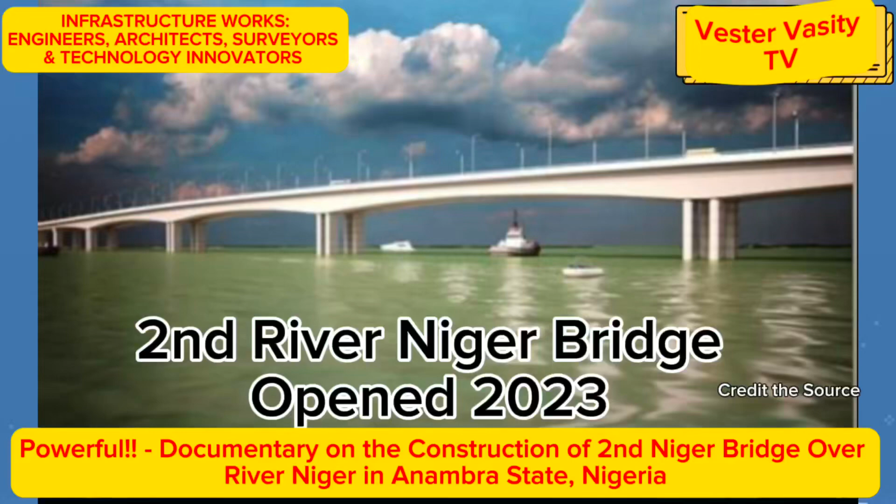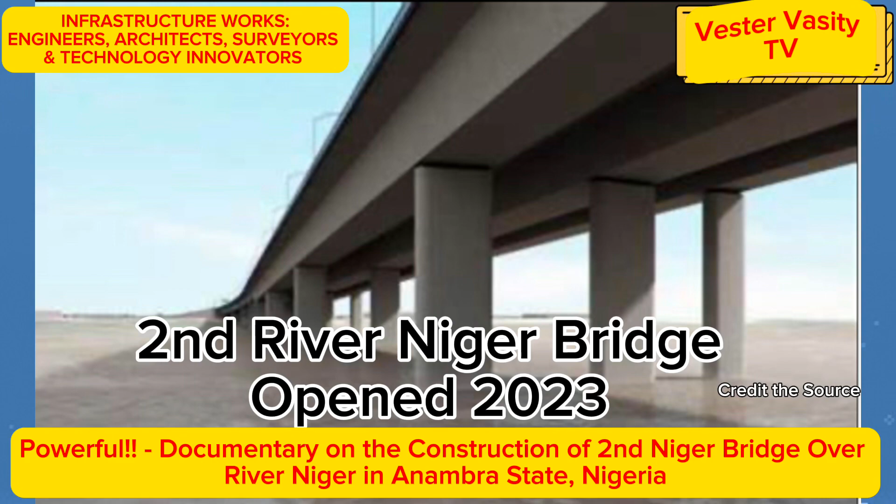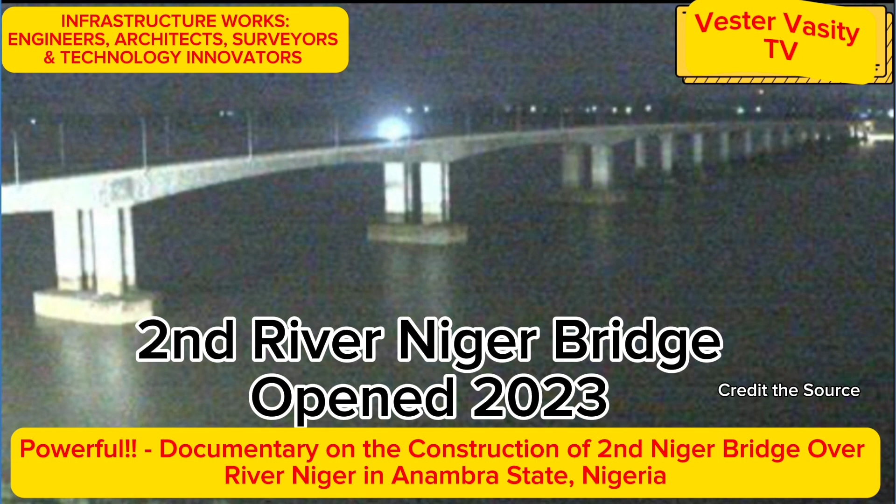This video presents a detailed and thorough analysis and documentary on the construction of the second Niger Bridge in Anambra State, Nigeria, recently opened to traffic and motorists. It will replace the existing first Niger Bridge, completed and opened to traffic in 1965, which is now obsolete.

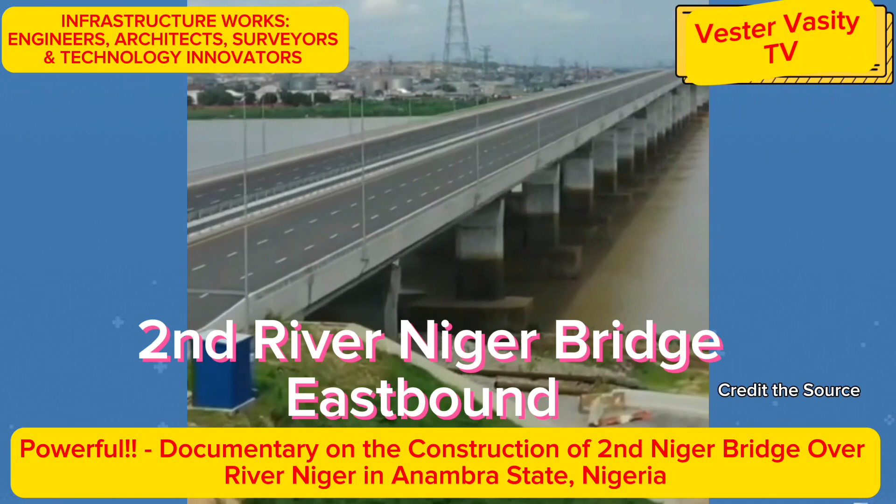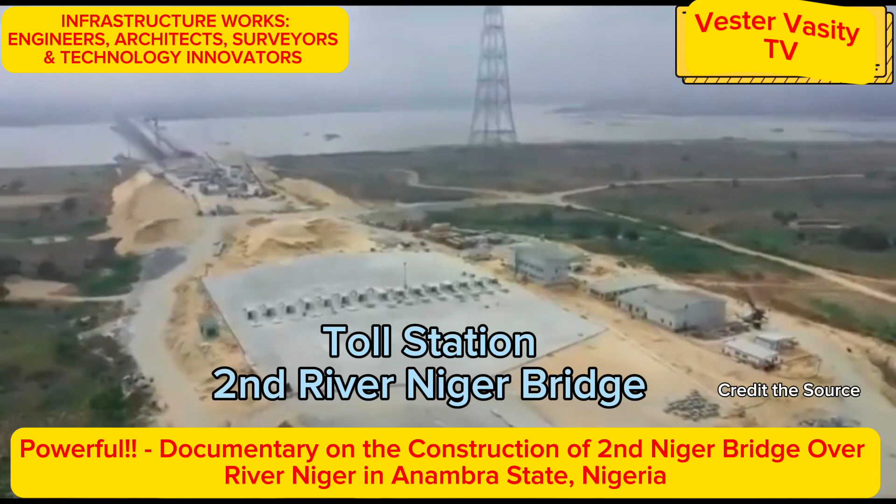It's important to emphasize that this second River Niger Bridge project was developed and funded through a public-private partnership (PPP), involving Julius Berger and the Nigerian government. The private contractor Julius Berger provided the planning, logistics, and construction of the second Niger Bridge.

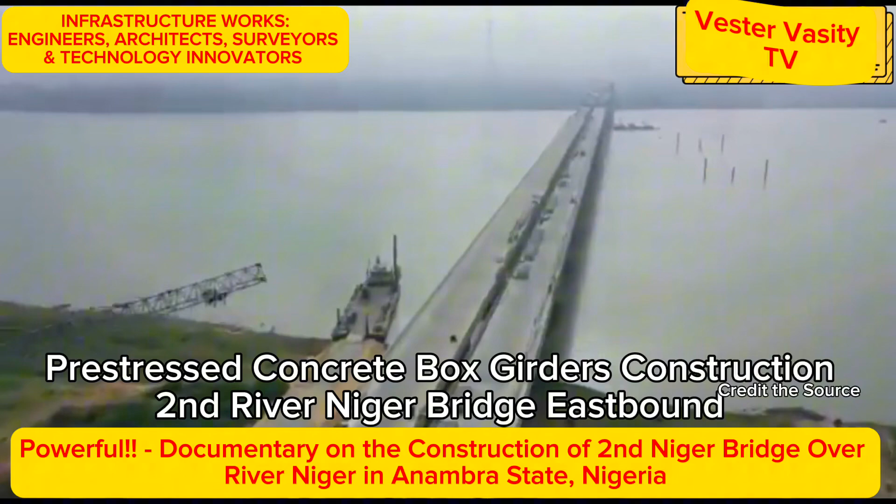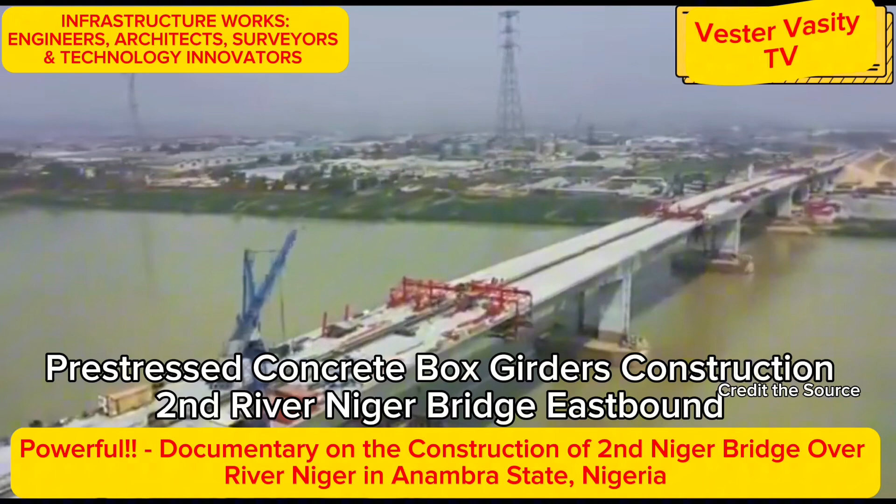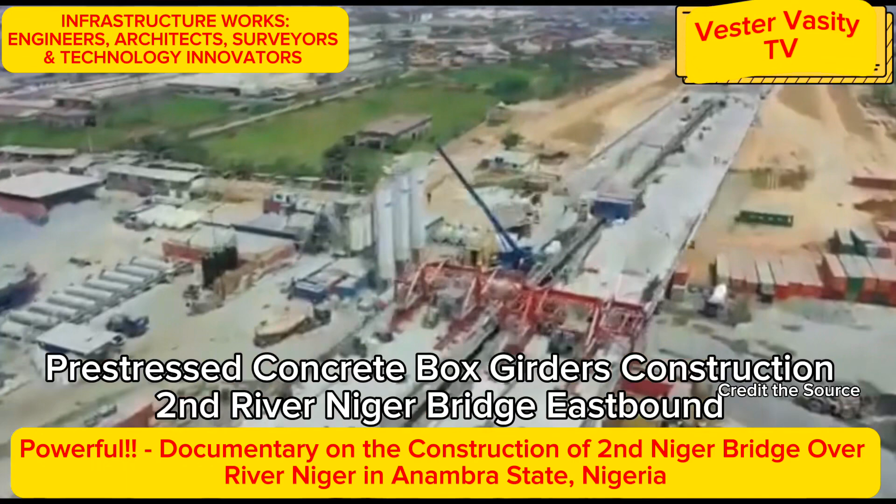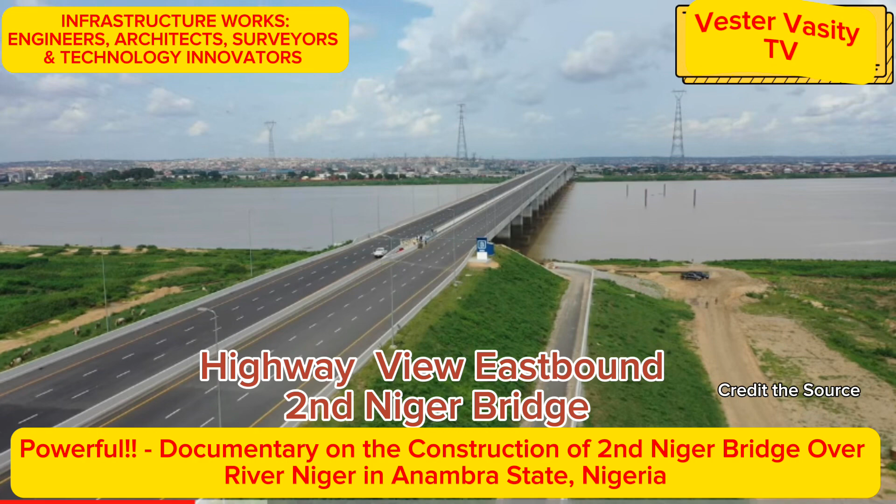The scope of work for the second Niger Bridge comprises the construction of a 1.60 kilometer, or approximately 1.01 mile long, dual elevated single cell pre-stressed concrete box girder bridge across the River Niger with a maximum span of 150 meters, or about 500 feet, as well as one motorway interchange junction, one toll station, and 10 kilometers, or 6.21 miles, of dual highway road network.

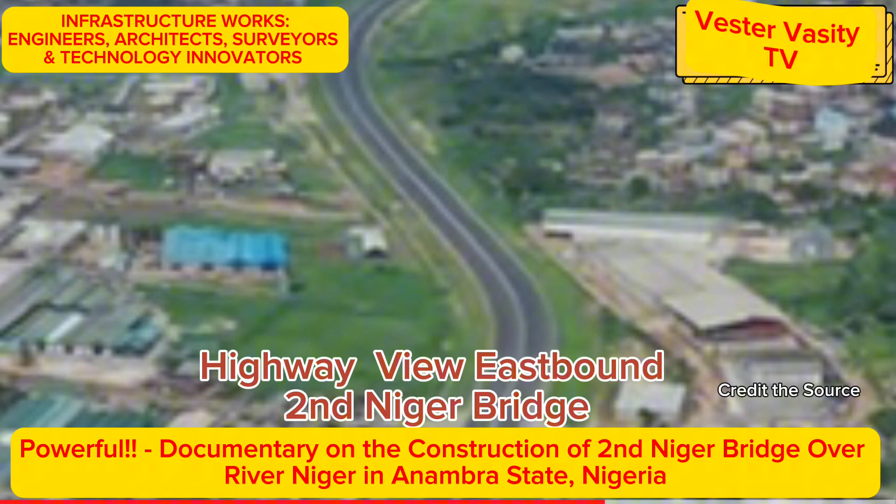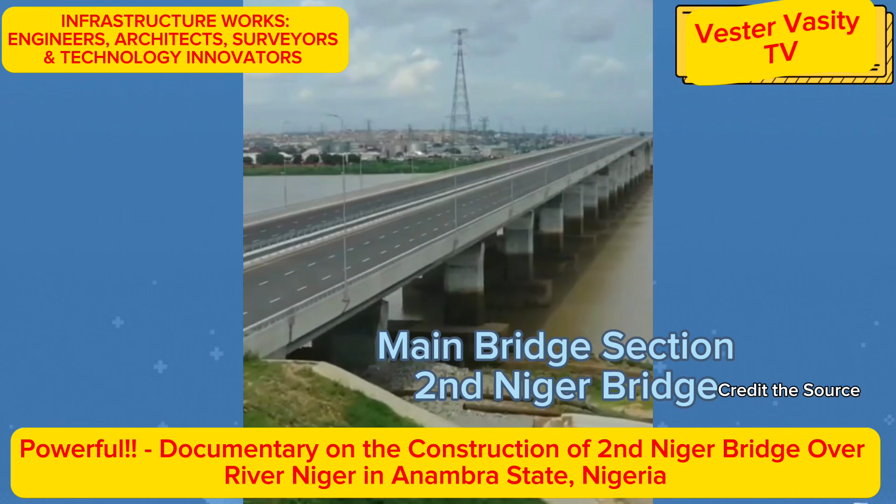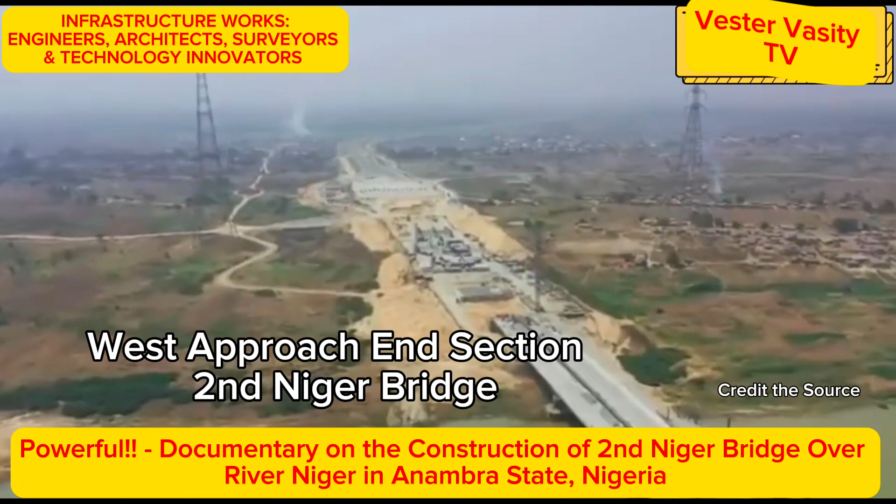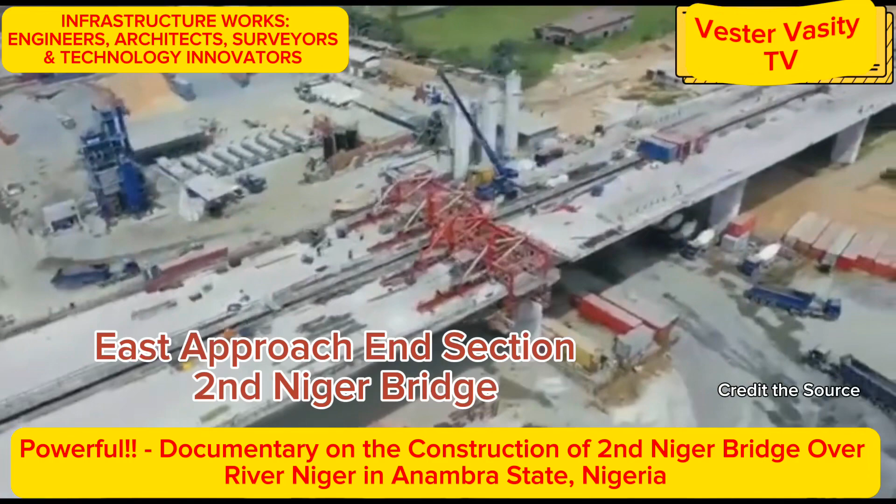The following are the standard steps needed to construct any bridge across a river or body of water. Step 1: Conduct a site analysis to determine the best location to build a bridge based on the following factors: the width of the river (in this case River Niger), the depth of the river, the strength of the water currents, and the soil conditions at the bottom of the river.

The chosen location should be able to support the weight of the bridge, to withstand the loads it will be subjected to, be easily accessible for construction materials and purposes, and be cost effective to build.

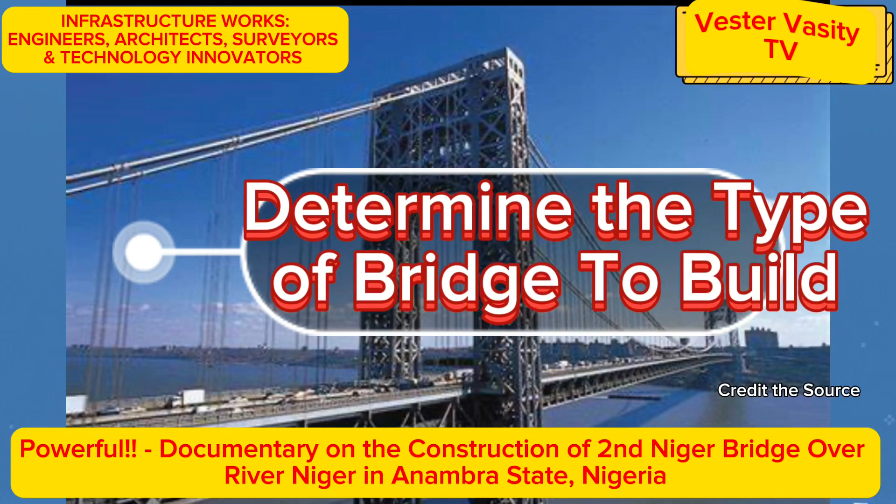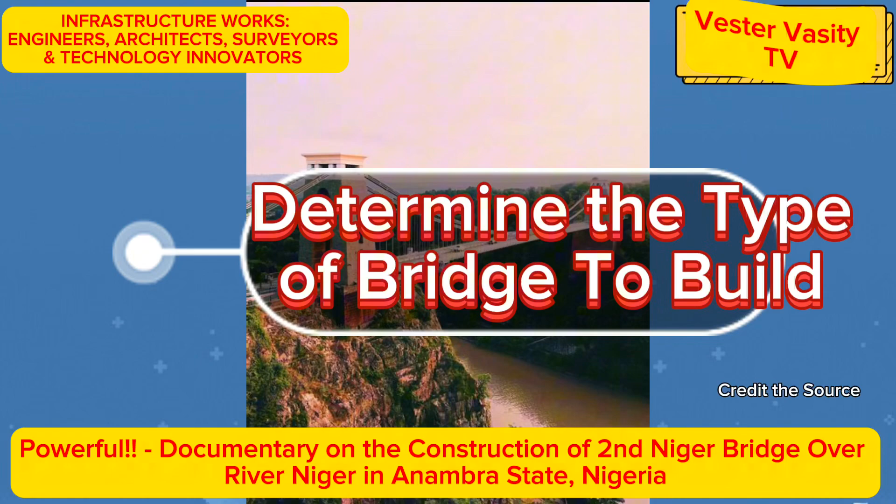Step 2: Design the bridge, in this case the design of the second River Niger Bridge. First, determine the type of bridge to build based on the span of the bridge, the terrain of the location, the type of loads the bridge will need to support, and the availability of local material and resources at the location.

The main types of bridge to consider are: 1. Girder or longer beam bridge, for cost-effective and shorter span bridges. 2. Arch bridge, for spans over valleys or mountains. 3. Suspension bridge, for longer spans over water. 4. Cable stayed bridge, for medium and long span bridges.

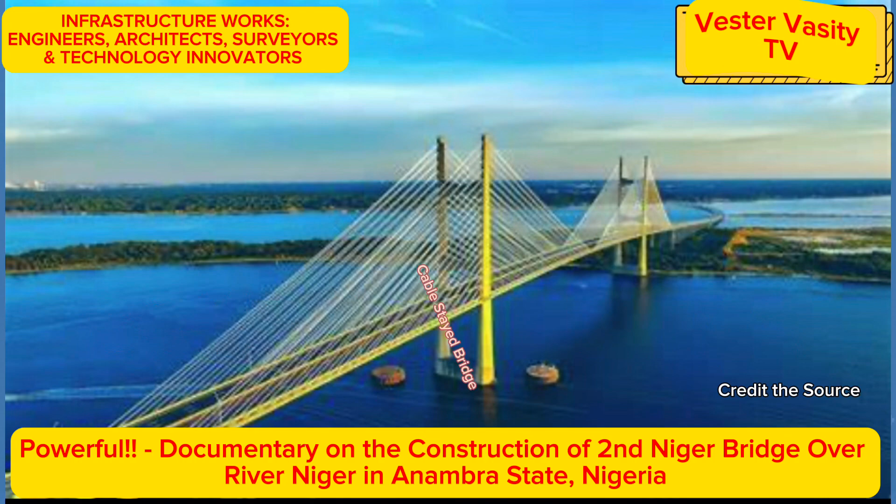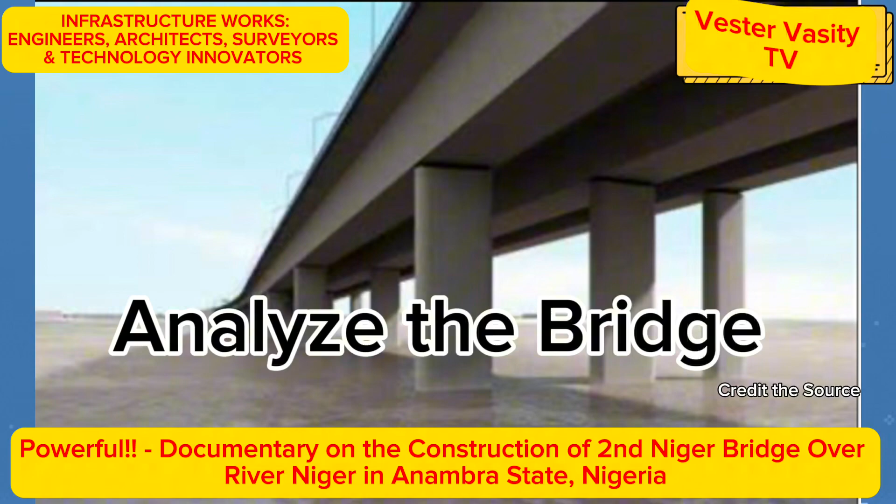After selecting the type of bridge to construct, the designer would carry out the analysis and determine the size and shape of the bridge components, by calculating the loads and stresses the bridge will be able to withstand, and by calculating the size of the girders or longer beams and other structural elements that make up the bridge.

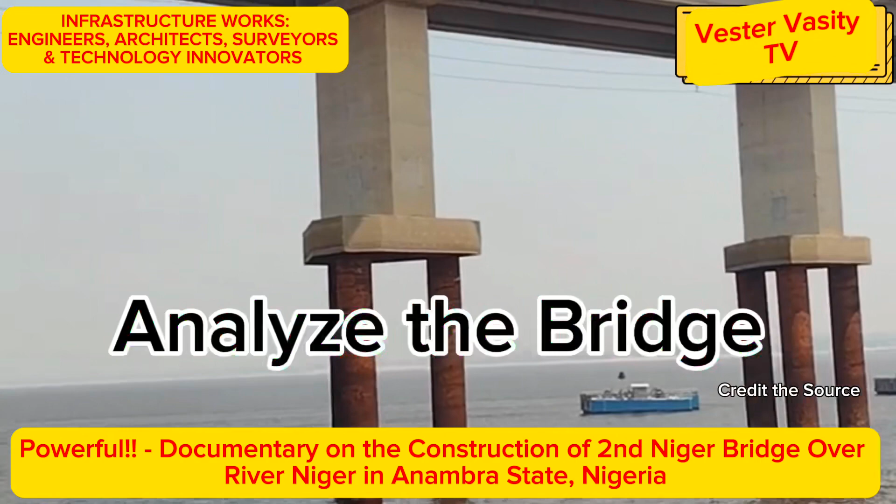The size and shape of these components will depend on the loads that the bridge will need to support, as well as materials, properties, and manufacturer's capabilities.

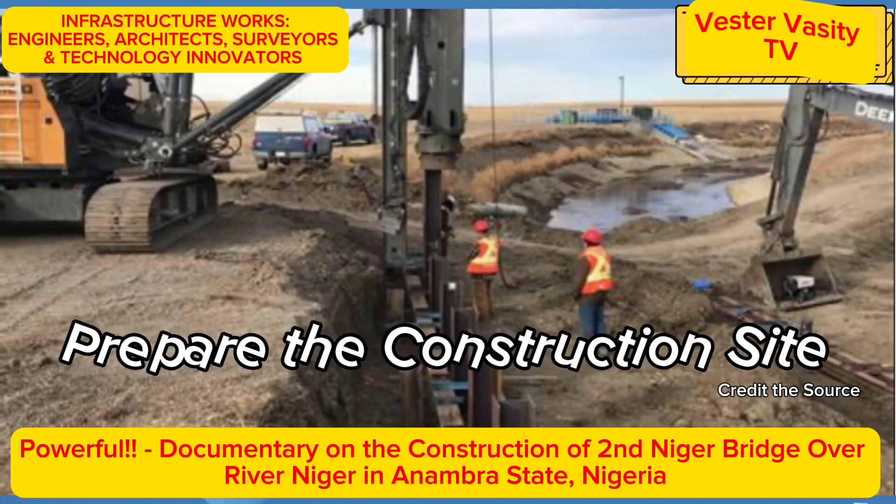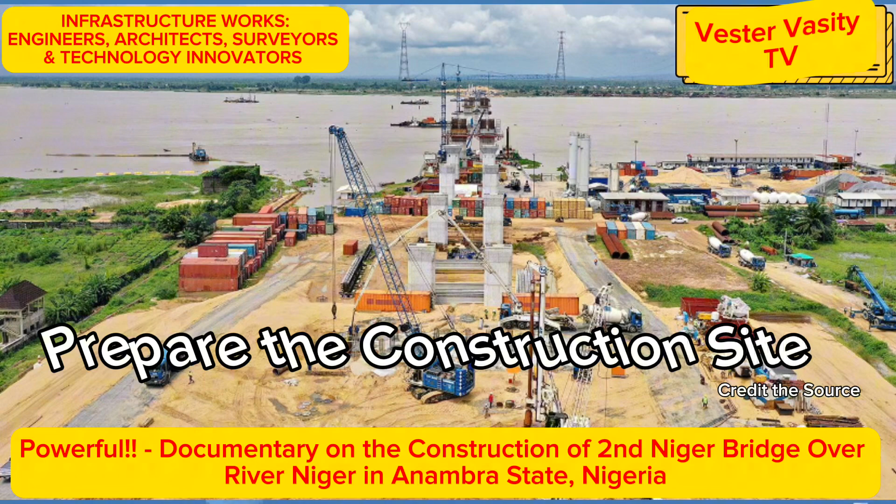Step 3: Preparation of the construction site. This may involve dredging the River Niger at the bridge location for installation of the piles, building the staging area or field for the equipment and material needed for the work, building temporary support structures including staging cranes, dredgers, loaders, concrete plants, pre-stressed concrete facilities, dump trucks, concrete trucks, etc., and installing coffer dams, enclosure and fencing, and other support structures and trailers needed for this work.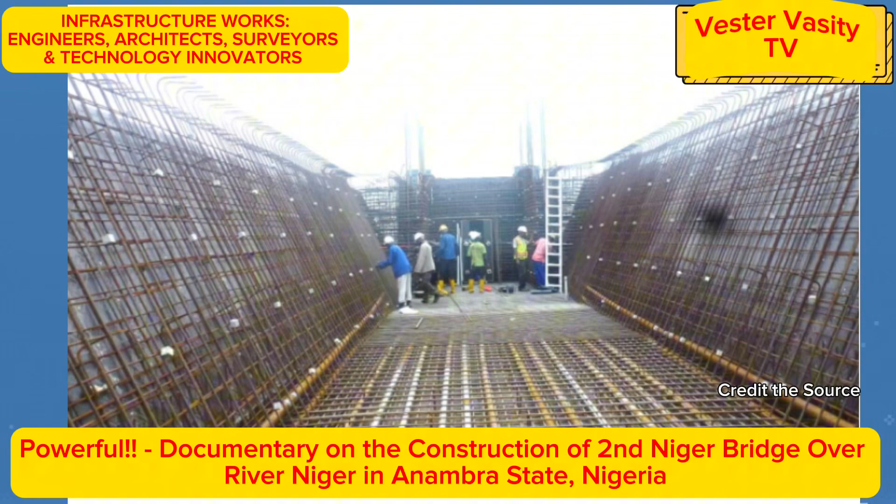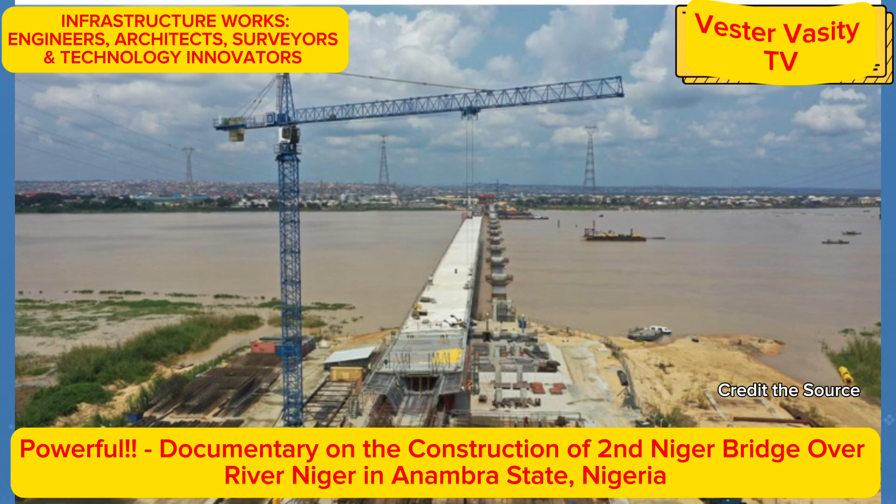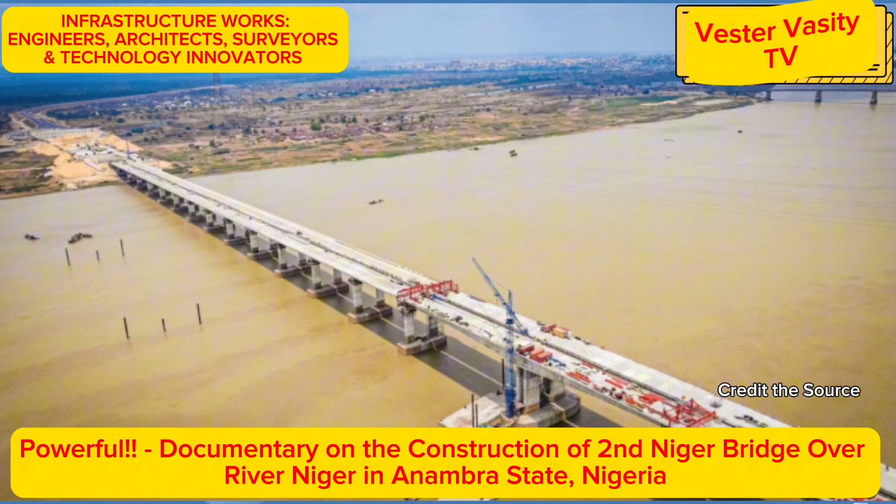Step 4: Construct the second Niger Bridge. Based on the field data developed during the site analysis, the designers determined that the second Niger Bridge should be designed and constructed using single cell pre-stressed concrete box girders, or bigger and longer size beam bridges, across the River Niger.

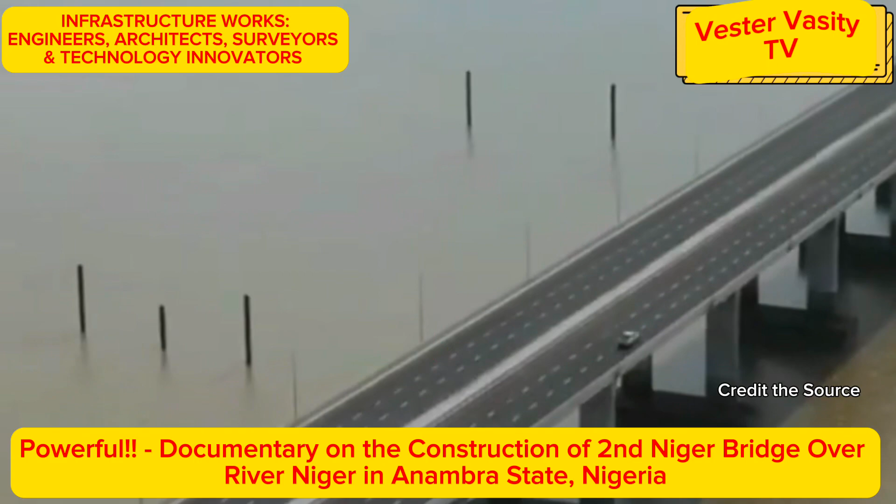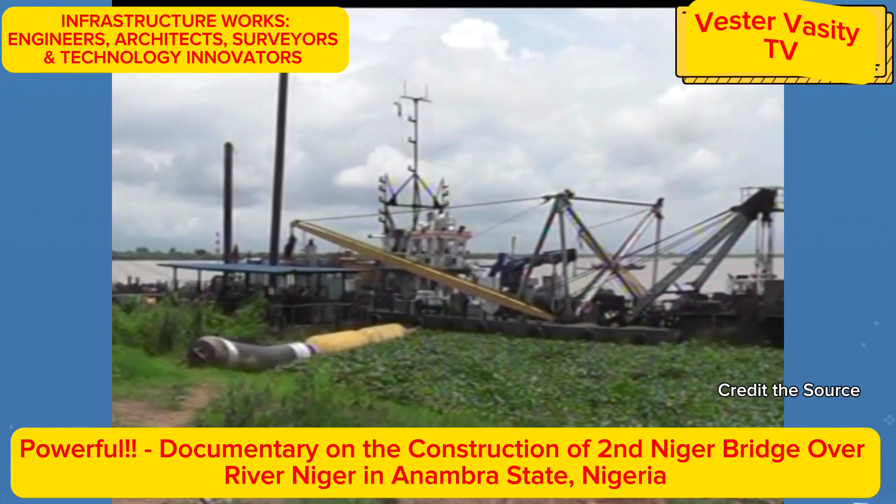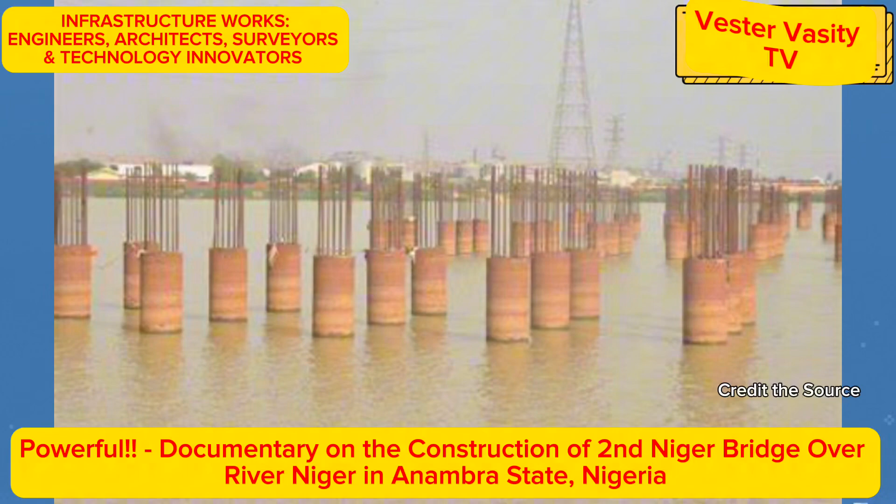In summary, these single cell pre-stressed concrete box girders were fabricated on site behind the abutments and placed on the constructed reinforced concrete bridge abutment with pile foundations, then mechanically pushed onto the constructed reinforced concrete piers on pile foundations. Then the concrete and asphalt bridge deck were placed on top of the girders, and traffic barriers and other safety devices were installed afterwards.

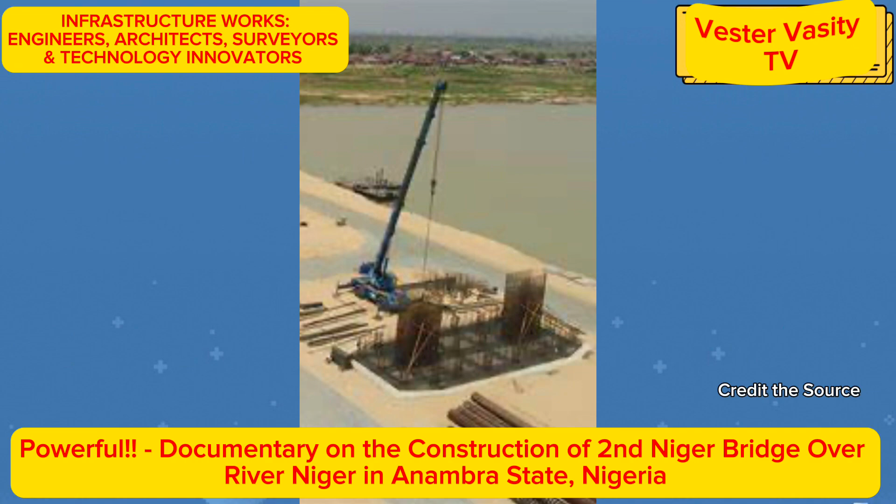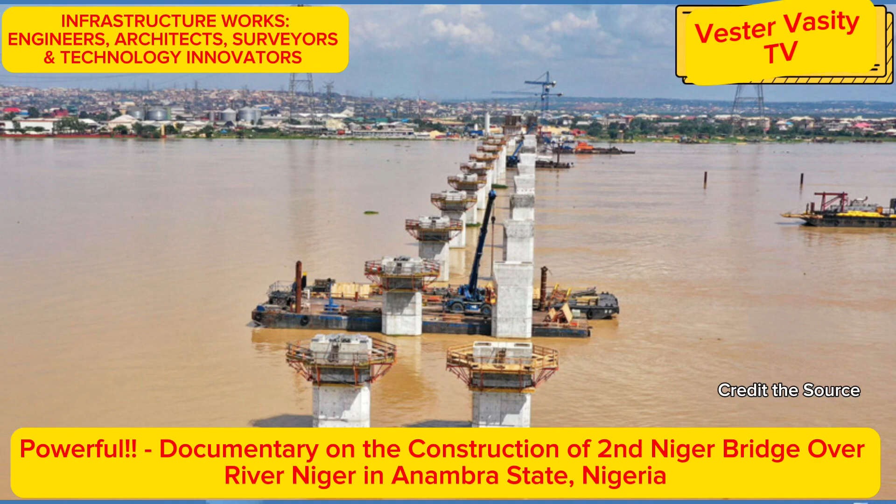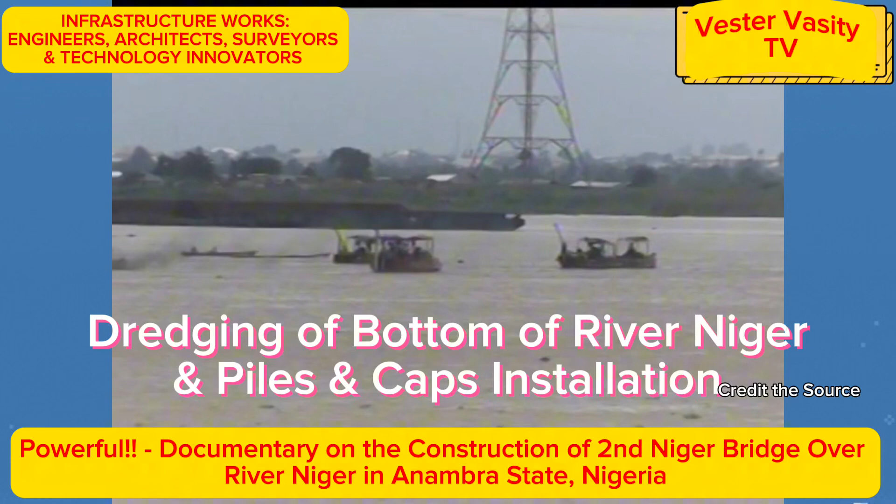Several phases were used to construct the two single-cell pre-stressed concrete box girder bridges in parallel across the River Niger. Phase 1: Dredging was completed to remove unsuitable and muddy soil using dredgers, dredge pipes, and buckets, and piles and pile caps were then installed for the deep foundation needed over water.

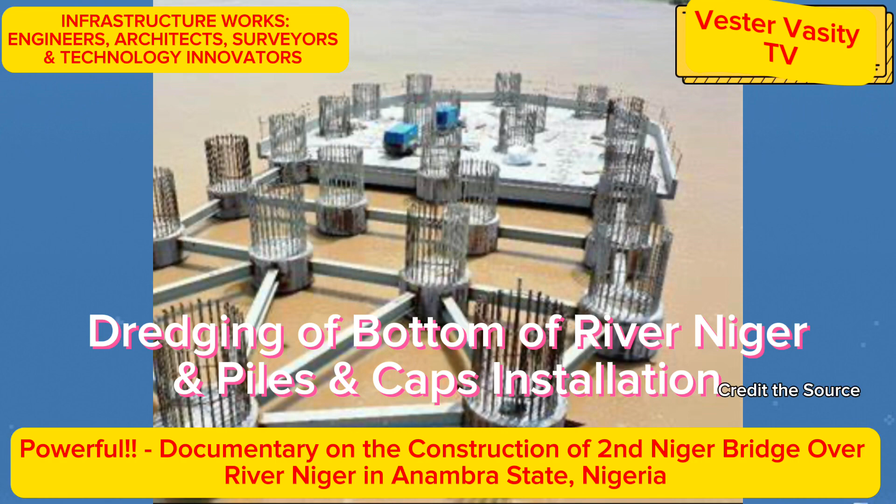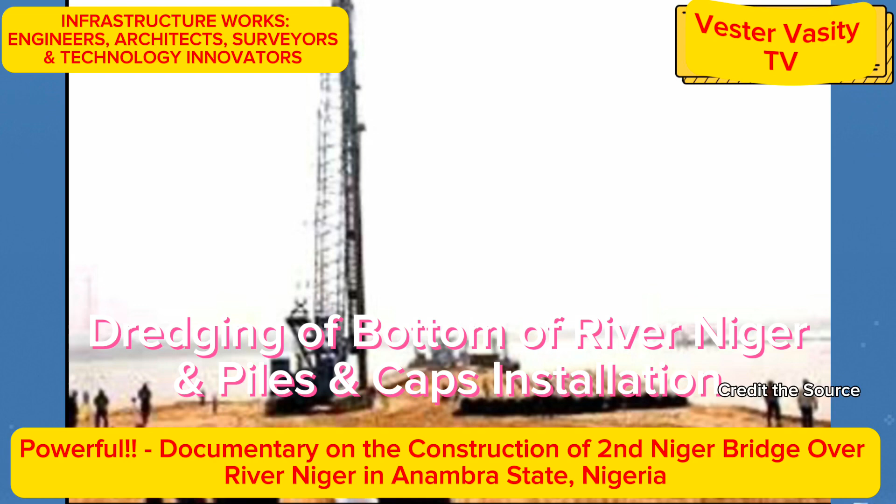Temporary support structures were used for this work. The piles were installed to withstand the water current and to support the dead load of the bridge and the dynamic load of the traffic and wind.

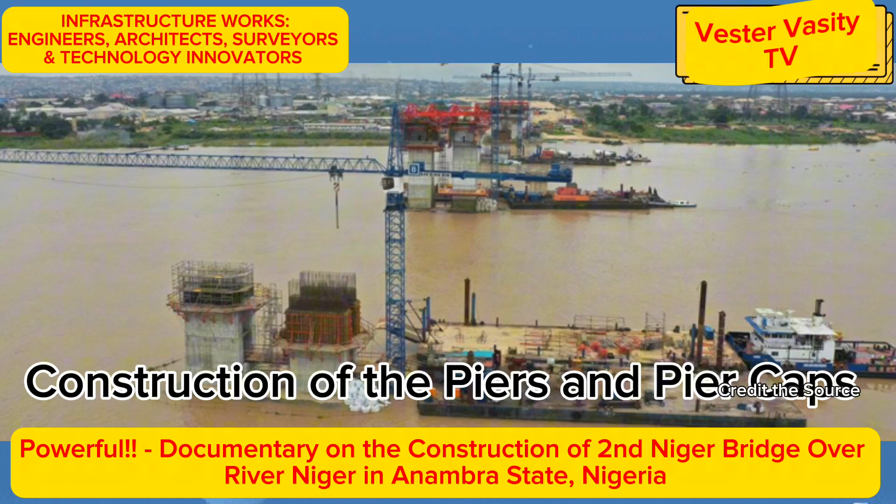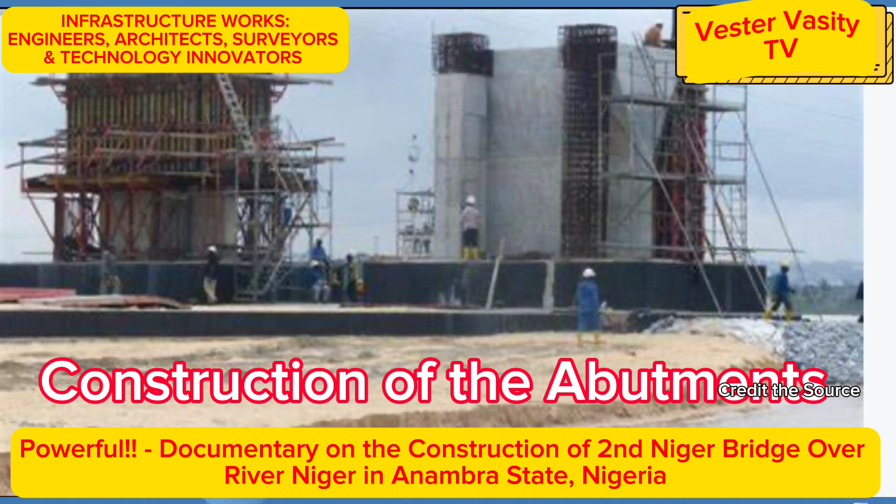Phase 2A: Installation of the piers and pier caps, using temporary support structures. Phase 2B: Installation of the abutment and back wall, again using temporary support structures. Phase 2C: Installation of wing walls, and backfilling, grading, and compacting soil behind the wing wall and abutment.

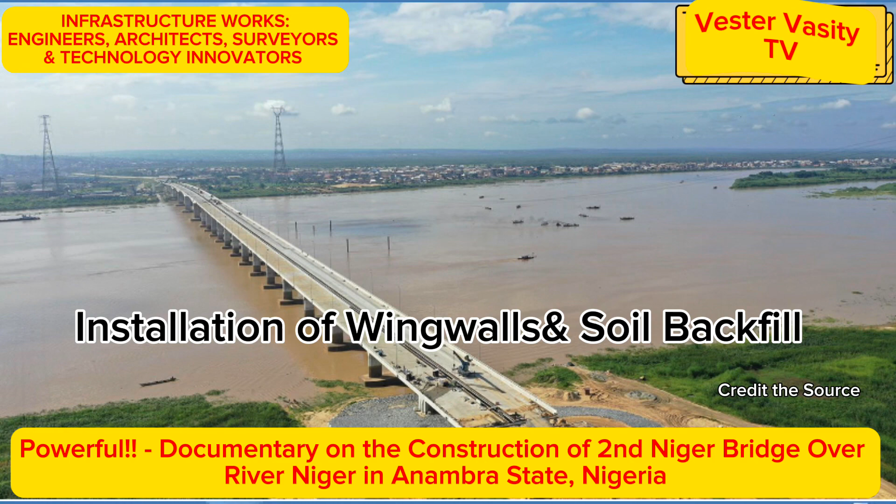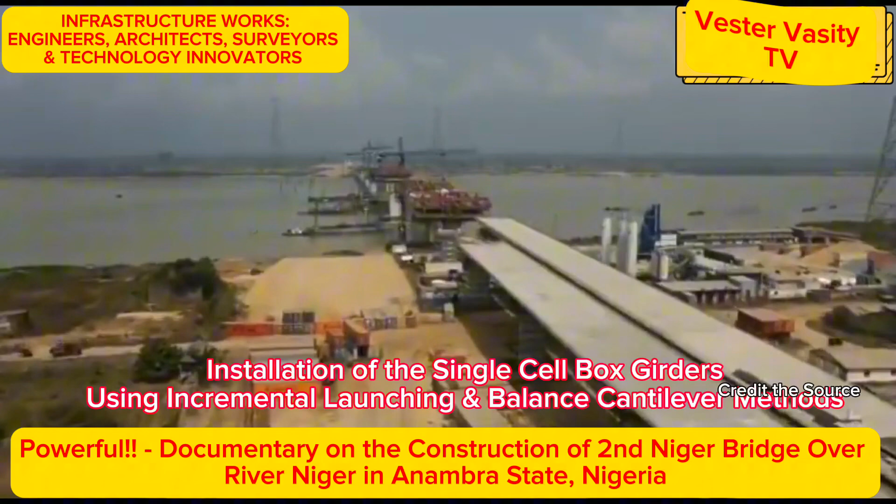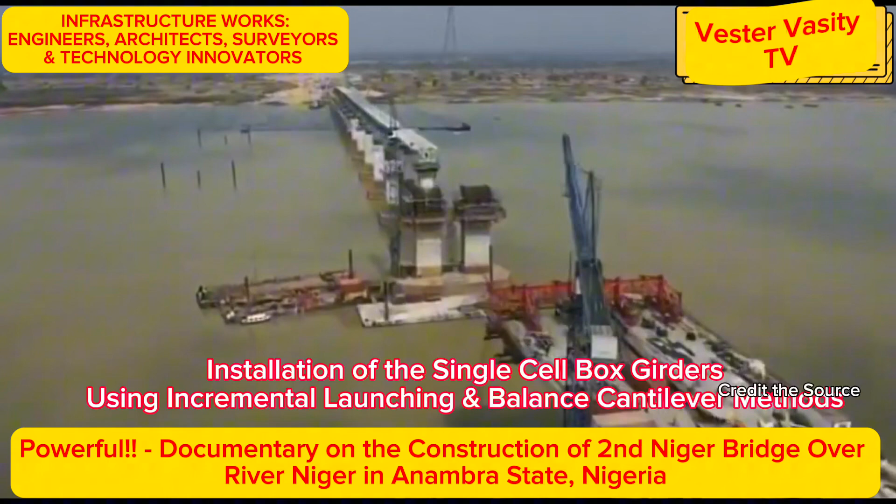Phase 3: Installation of the bearings and the pads. Phase 4: Installation of the single cell pre-stressed concrete box girders on the two parallel abutments and piers, using two modern installation methods: the incremental launching method, also called the push-out or clock push method, and the balance cantilever method.

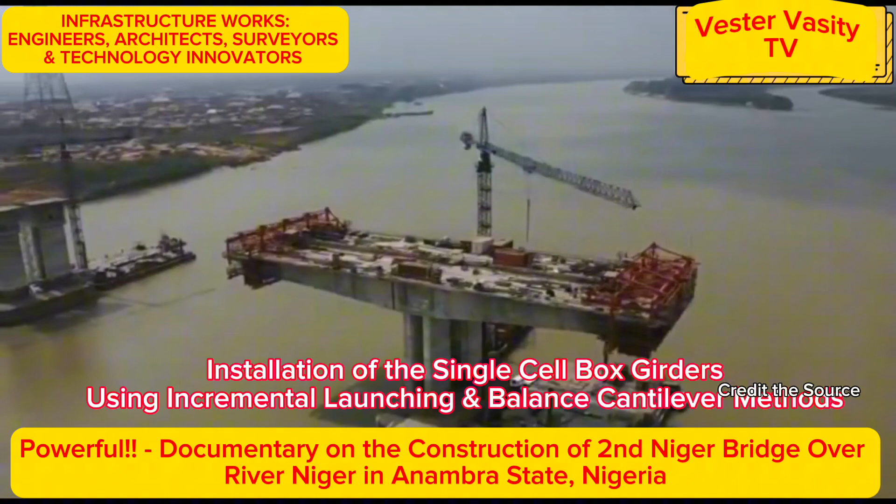To emphasize, the construction of the second Niger Bridge used single pre-stressed concrete girders installed with the modern incremental launching method, or push-out method, and the balance cantilever method.